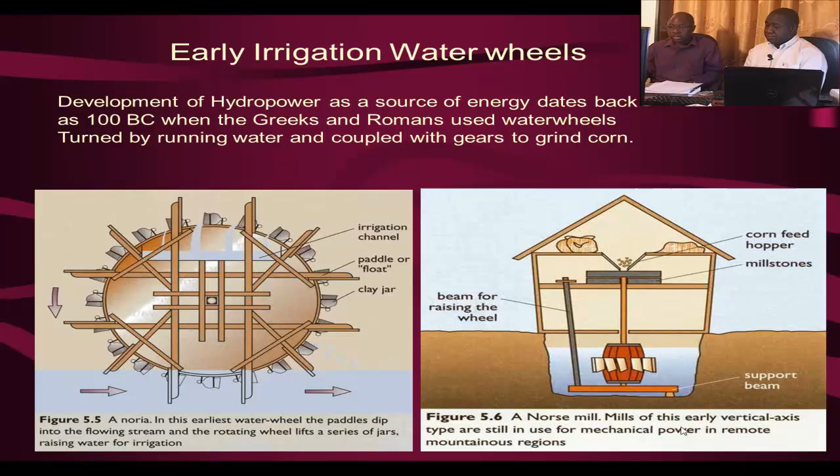Hydropower development as a source of energy dates back as far as 100 BC, when the Greeks and Romans used water wheels turned by running water and coupled with gears to grind corn. And so here we see that in terms of the historical development, the emphasis was on agriculture and food processing, and as alluded to, particularly in the area of grinding of maize.

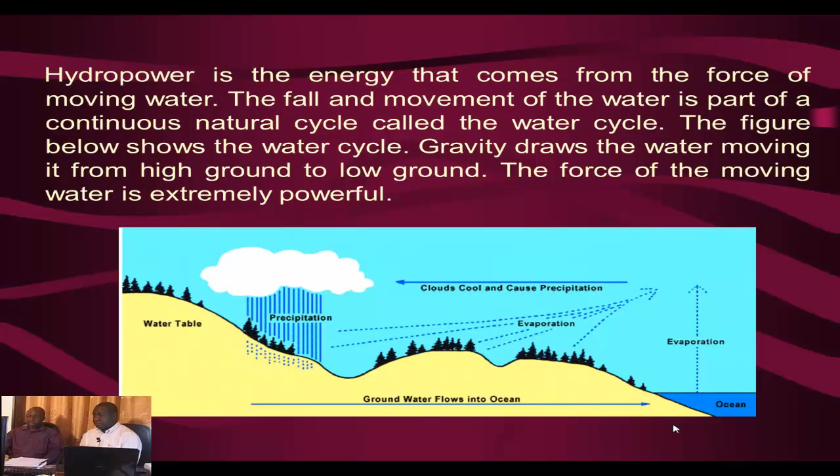Hydropower is the energy that comes from the force of moving water. The fall and movement of water is part of a continuous natural cycle called the water cycle. And the figure below shows the water cycle. Gravity draws water, moving it from high ground to low ground. And the force of moving water is extremely powerful.

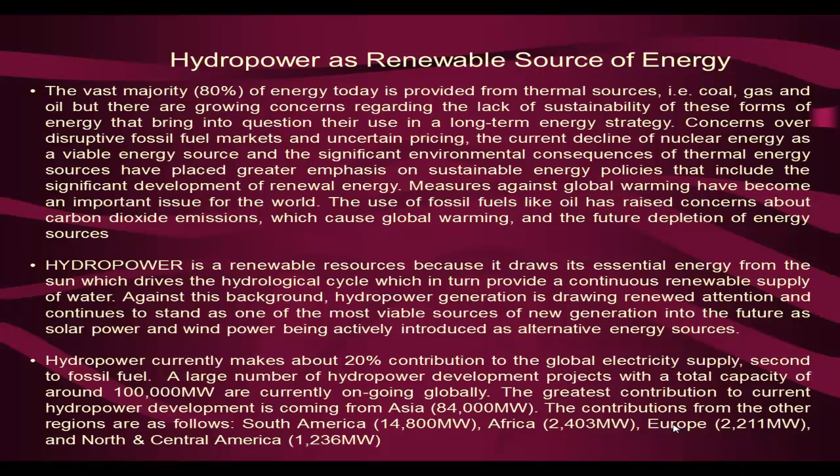Hydropower is a renewable resource because it draws its essential energy from the sun, which drives the hydrological cycle, which in turn provides a continuous renewable supply of water. Against this background, hydropower generation is drawing renewed attention and continues to stand as one of the most viable sources of new generation into the future, as solar power and wind power are being actively introduced as alternative energy sources.

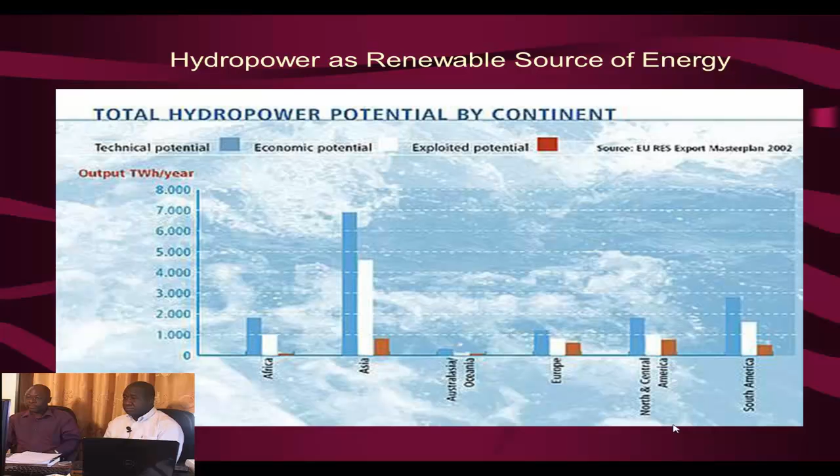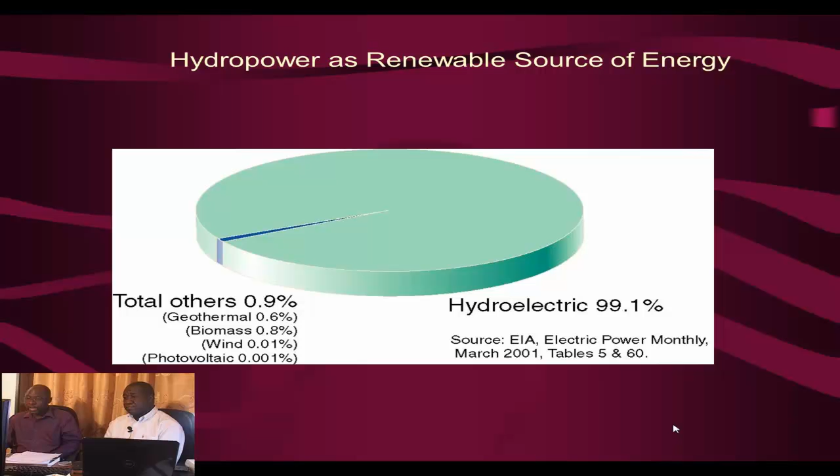This graph also is a pie chart showing hydropower's contribution to the total renewable energy mix. It shows hydropower contributing about 99% to the total renewable energy mix. The other renewables, geothermal, biomass, wind, and photovoltaic, contribute only 0.9. That shows hydropower as a dominant renewable energy resource.

The major hydropower producers can be summarized as follows. Here, my list shows Canada with something around 67,000 megawatt installed capacity, and then also the United States of America with something around 80,000 megawatt installed capacity. You have countries like China with installed capacity of 65,000 megawatts, and also India with something around 22,000 megawatt installed capacity.

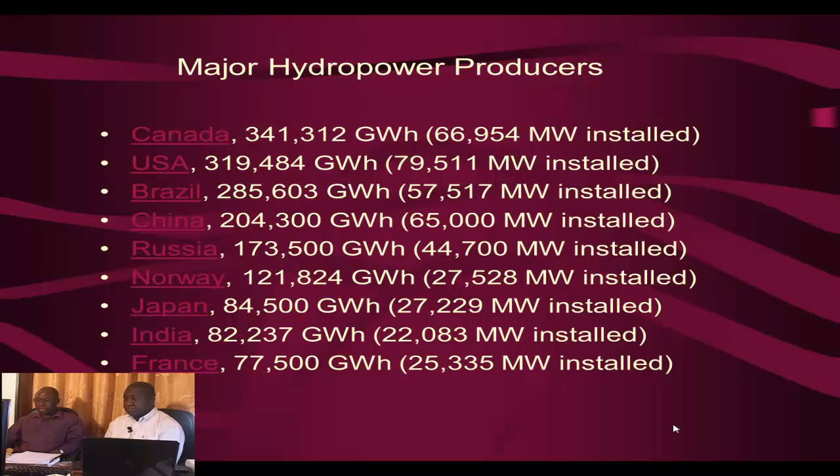The major hydropower dams have also been listed here. Here you have the Three Gorges in China, which has 23,000 megawatt installed capacity. This project was completed in 2009. You have the Itaipu, which was a joint project between Brazil and Paraguay. The completion year was 1983, and the capacity is something around 13,000 megawatts.

And you have the Churchill Falls in Canada, which is 5,000 megawatts, and the Iron Gates, which was also a joint project between Romania and Serbia, which has installed capacity of 2,000 megawatts.

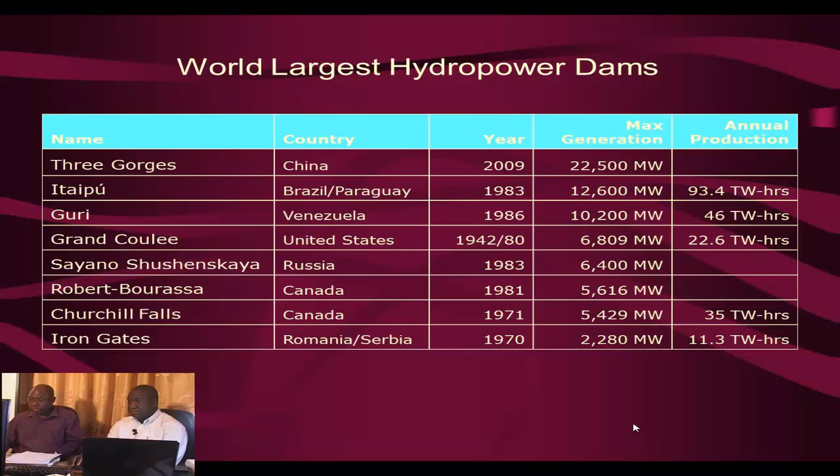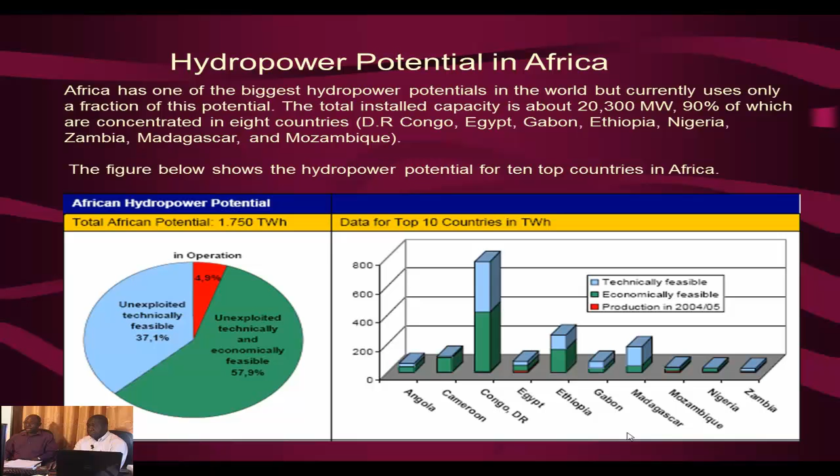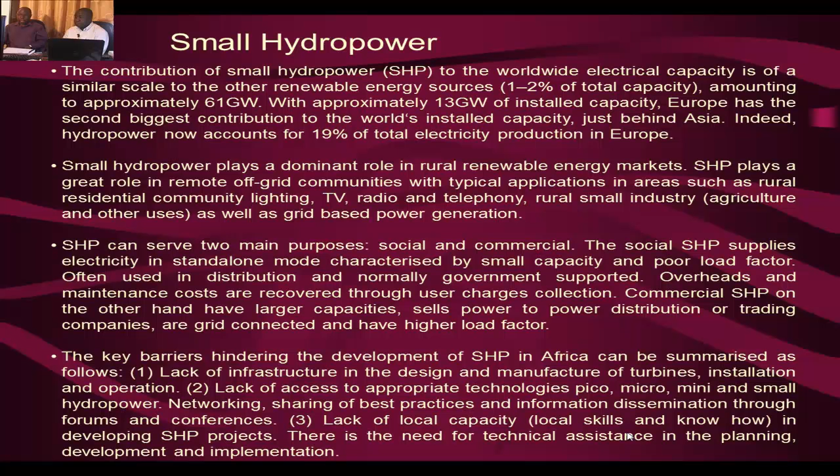Small hydropower plays a dominant role in rural renewable energy markets. SHP plays a great role in remote off-grid communities with typical applications in areas such as rural residential community lighting, TV, radio and telephony, rural small industry, as well as grid-based power generation.

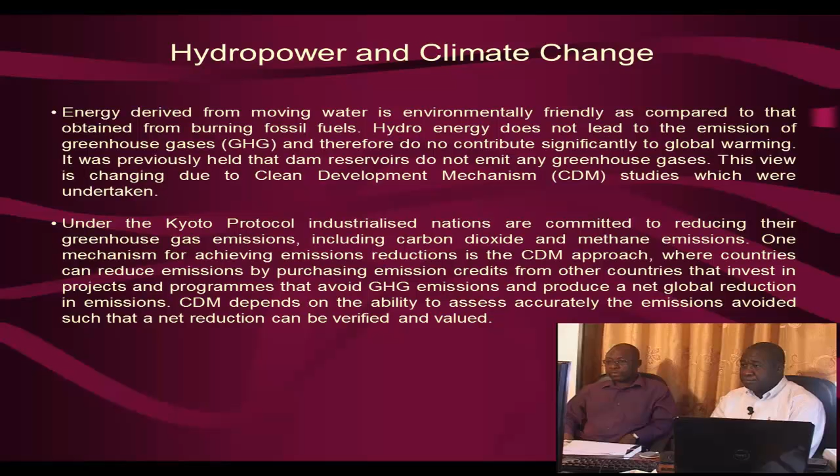Hydropower and climate change. Energy derived from moving water is environmentally friendly as compared to the other energy sources such as fossil fuels. Hydro energy does not lead to the emission of greenhouse gases and therefore does not contribute significantly to global warming. It was previously held that dam reservoirs do not emit any greenhouse gases. This view is being challenged due to the Clean Development Mechanism studies which were undertaken.

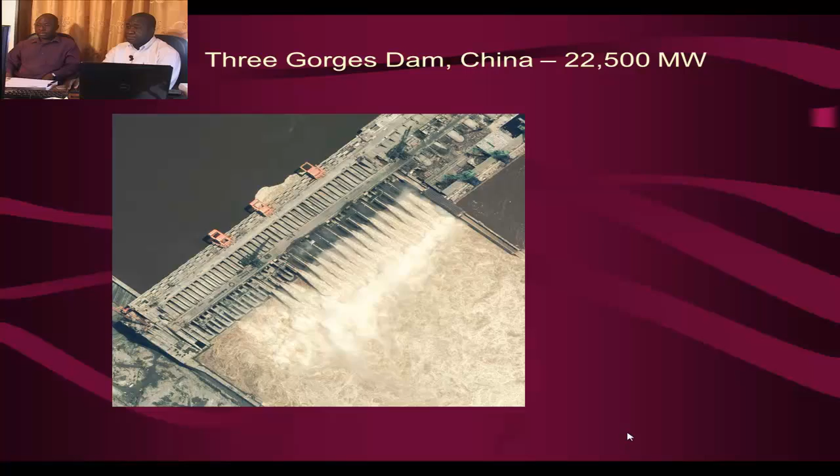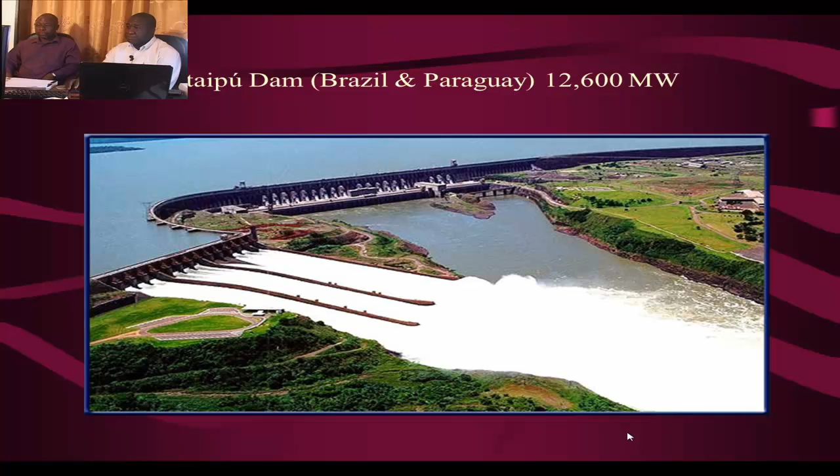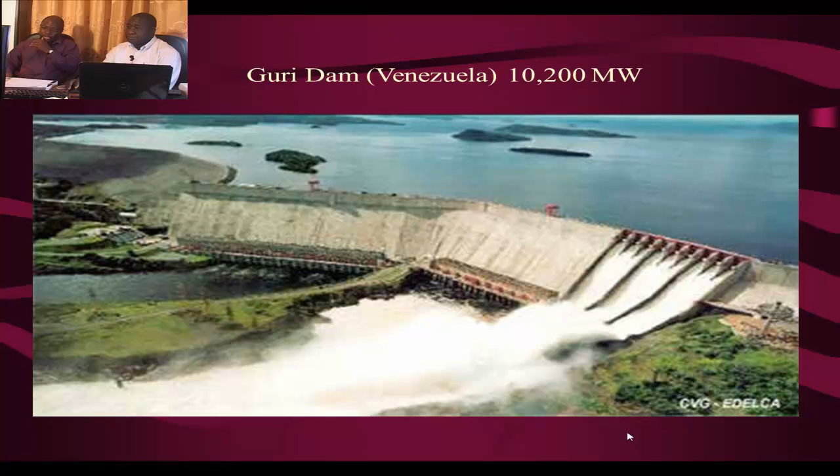Here we have some photographs of the Three Gorges in China. Very beautiful photographs. These are photographs of some of the major hydropower constructions in China. Here we have one from Itaipu in Brazil. Beautiful construction. The Guri Dam in Venezuela, which has a capacity of 10,200 megawatts.

Okay, and now this slide also contains the pros and cons of hydropower. Here, hydropower is seen as emission-free with virtually no carbon dioxide and sulfur dioxide, as well as hydrocarbons or particulates. Hydropower is a renewable resource with high conversion efficiency to electricity, somewhere around 80% and over. So very high conversion efficiency.

Dispatchable with storage capacity. Here it can be used for base load, peak load, and also pump storage applications. It's scalable from 10 kilowatts to 20,000 megawatts. Low operating and maintenance costs, long lifetimes. These are all very, very important.

And I've also got a list highlighting the disadvantages of hydropower. It frequently involves impoundment of large amounts of water with loss of habitat due to land inundation. There's also variable output dependent on rainfall and snowfall.

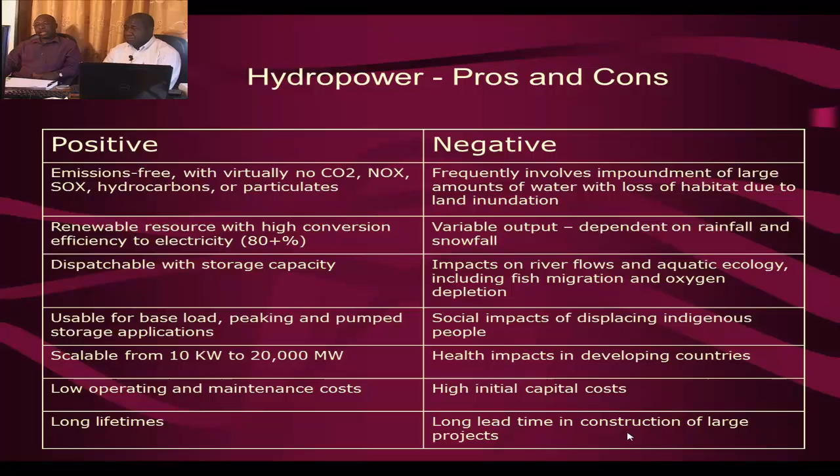The impacts on river flows and aquatic ecology, including fish migration and oxygen depletion, and also, of course, the social impacts of displacing indigenous people, the health implications in developing countries, the high initial capital costs, and also the long lead time in construction of large projects.